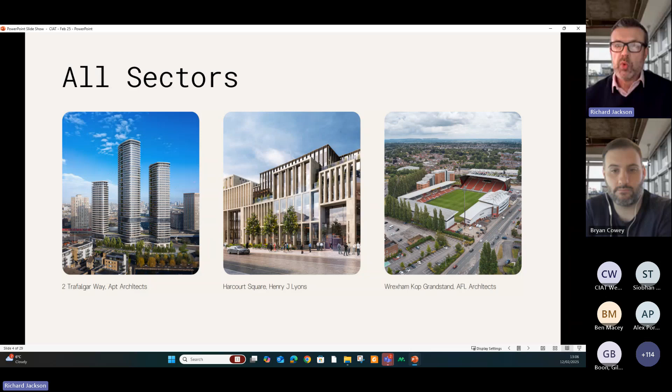These are the types, some of the clients that we work with - big names, little names, international practices, even down to small 1 or 2 man band practices. So we cover all shapes and sizes, we're not just covering the top 5% of the work, we're down to doing domestic scale too. Like I say, lots of different sectors - sports, commercial, residential, all sorts, even including large opera houses in the Middle East. So the scale and breadth of our experience is pretty broad.

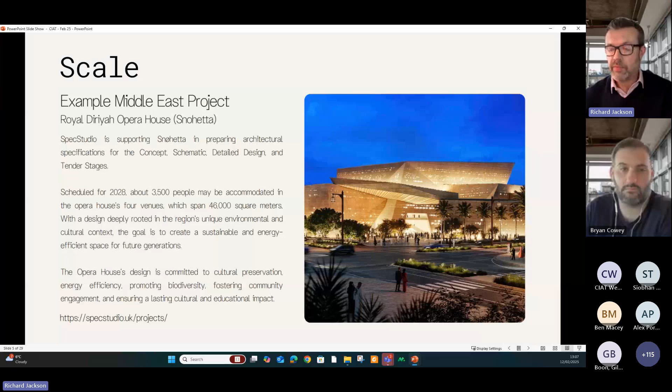So specification consultancy. A lot of practices over the years have had in-house spec writers, and it's usually a very experienced person who ends up working on most of the projects. Again, these people are few and far between, and it's a very skilled profession. But it's very difficult to retain those people. It's also difficult to gain knowledge of wider projects experience.

And this was really where specification consulting came from, in the late 90s with Foster and Partners, whereby the need to prepare different types of specifications to suit procurement came into play. The design and build really came to the fore, and performance specs in those days just weren't really available.

So that's really where it became a starting point. We were preparing bespoke, detailed specs that reflected the design intent, and it's not just about writing what products were required, it's actually conveying to the contractor what he needs to do. And hence the specification consultant profession in the UK has sort of flourished now to the extent that it is actually a bona fide profession, and it's actually contained within the plan of work.

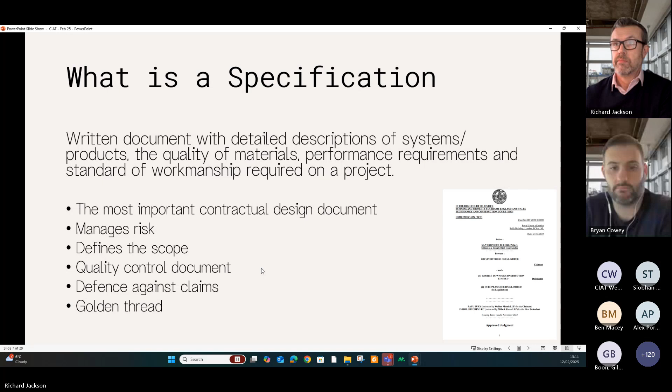It's not the most glamorous end of the design process. I think we all understand that, and most of these points would be quite familiar to a lot of you - hence why we're here. In terms of principles, these are things that really should never be done. It's quite surprising that specifications are given such low priority in the design process. There's a lot of emphasis given to the drawn set of information and the visual side of things, when the contractual element is contained within the spec, and that's really the important side of it.

So it should be started early. It shouldn't be copy and pasted from the previous one. It needs to be project specific and very clear and concise.

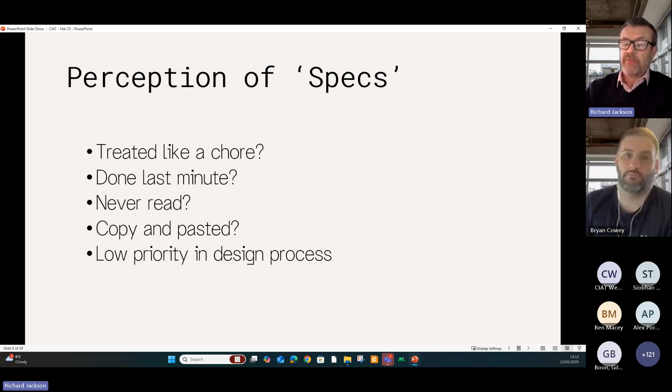In terms of base principles, the first thing we always say is, have you got your design responsibility buttoned down? Even the language we use now has been adopted by the RIBA in terms of prescriptive and descriptive information - these are extracts from the plan of work. In the old days these were specialist terms that weren't widely known. But having a clear and concise design responsibility matrix, both in terms of your appointments and right the way through when the contractor comes on board, is absolutely vital to set out who's doing what and when.

It doesn't have to be in this format, but ultimately it is a key document. So in terms of principles, that's the first thing we would advise every practice to adopt.

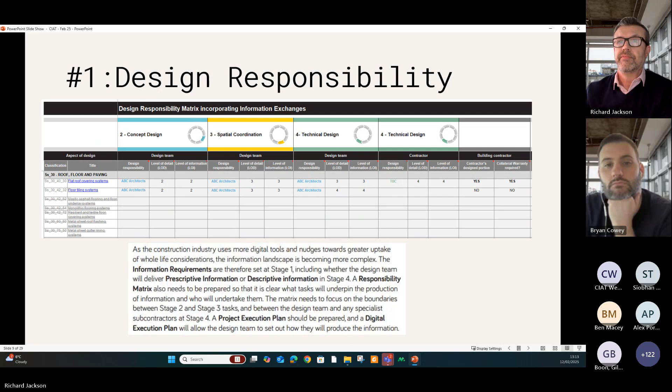Ultimately, the way we view it is there are two forms of specification. There's one which is prescriptive, whereby the designer takes design responsibility for the element - it might be that you fully name a product, or it might be materials and workmanship. But ultimately it's something the designer takes on board, whether that's the architect, landscape designer, technicians, whoever. The other is descriptive, which is a performance spec with the visual intent of the design drawings associated with it. In the old days we used to have clause 42, which was a non-visual item, but ultimately it's still descriptive - it's still a CDP item.

There's lots of different variations people come up with, like prescriptive plus or descriptive plus, and there are subtleties associated with all those variants. But when you distill it down, there's two main routes, and it makes life a lot easier to think about it that way.

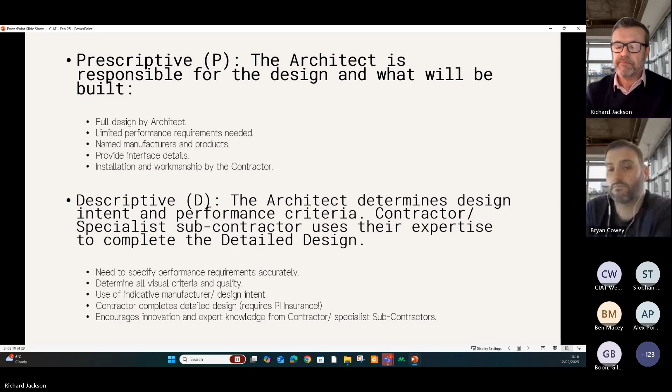The second key thing is that the specs should reflect the procurement route and form of contract. Here in the UK, the majority of projects fall into four categories of procurement. Traditional, obviously, where you're working right the way through as a designer. Design and build has been the most popular for major projects over the last 20 years. However, increasingly we're now seeing more MC and CM type contracts where clients want more influence over the actual procurement and less associated with a contractor, or where contractors don't want to take on the risk.

But the way the specification is written needs to be related to how it's going to be procured, and each of those come with their own quirks. Both MC and CM are usually done in packages, whether works packages or trade packages. The terminology for the various parties associated with those procurement routes needs to be embodied into the spec. So if it's design and build, it would be the employer or the employer's agent written to the contractor. If it was management contracting, it might be the management contractor to the works contractor, things like that.

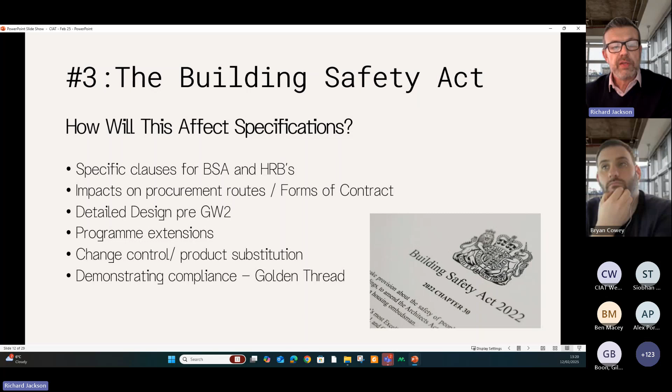But ultimately, in terms of spec, there needs to be the golden thread running through it in terms of demonstrating compliance. That means updating specification or being able to trace the authorship right the way through at the various different stages and who is taking ownership for those decisions. That comes through in terms of digital model, outputs from digital model, etc. But ultimately, from a specification perspective, there needs to be a way to track the changes. Again, there's no pro forma for that.

We're seeing in terms of programs, people are now incorporating specific durations into these for Gateway 2. Whether or not they are realistic is a different matter given the backlog. But it's just an example, really, that this is having a big impact on design teams right the way through Gateway 2 and also coming up to Gateway 3 now.

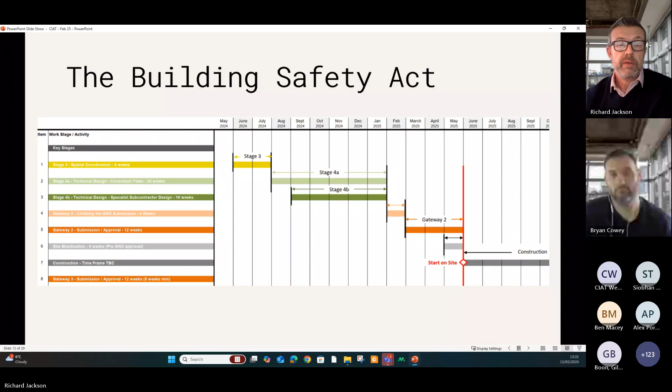So I'm just going to hand over to Bryan just to run through the main types of specification formats that you'll probably see.

Generally, within the UK, we have our CAWS, which is our Common Arrangement of Work Sections, and Uniclass, which has come in to hit the BIM requirements. Generally be more agnostic across these systems. We also have our outlining specifications which can be used at an earlier point, and we have developed an in-house small works specification as well to help with smaller residential style schemes. We'll go through that in a minute. And we have the CSI MasterFormat, which is used internationally across the Middle East and other areas which we use.

It's difficult to hear, it's a bit crackly Bryan. Sorry, so there's obviously a breakdown. Yeah, sorry Brian, can I just come in there? I was just wondering if it was a distorted microphone to anyone else, and it might be that we continue as we are, but potentially you might have another microphone. Is that any better? Mate, that is so much better. Let's continue like that, thank you so much. Okay, yeah, sorry about that.

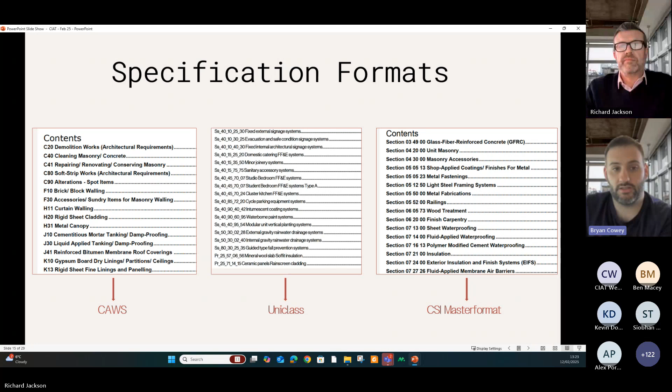Do you want to go to the next one? So we've got our CAWS here, published in 1987 and linked to SMM7. It's still probably our most popular one that we use in the UK still, and caters for the majority of clients where BIM isn't required.

I think what can be a misconception is that when you look at the BIM documents like EIRs and BEPs, you don't have to specifically use Uniclass specification formats. That is just kind of coding of the information within there, and you can still use your CAWS system because that's hitting more the level of information needs, which we've been looking at around how we can do all this.

So Uniclass is being developed by NBS, and it has kind of evolved into this system where people believe that they have to use this to hit the ISO 19650 requirements. But the feedback we've had from clients is generally that they're using it where they have to use it. They would prefer to use CAWS where possible.

It is a lot more prescriptive in the information that you have to produce, and having done a number of them, it can be a lot more time consuming to produce that information between it. And yeah, there's just a lot more workmanship and execution that's tagged on, as you're having to try and do that even in descriptive areas as well.

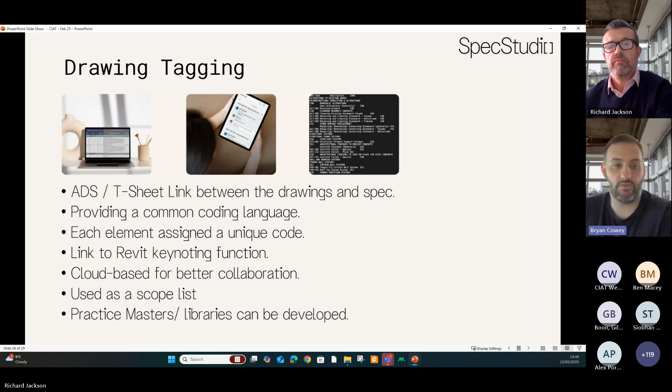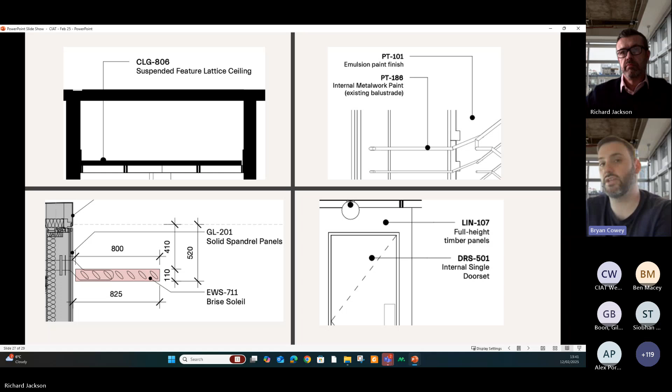This is how we advise people to tag these areas. If you've got, for example, CLG 806 suspended feature lattice ceiling, they can look at the ADS, which is published with the spec in one document, and the contractor is forced to look at the drawing, look at the ADS, and look at the spec. So all your information is within there - any framing out required, fixings, screws, everything is all within there, so they're reading the information side by side.

I've been a technician for a long time, and I've done the same, where I've put a lot of information on drawings, but through feedback with our client base, a lot of clients have taken on this way of doing it, so they are pushing the specs and the drawings to align more.

This one is a drawing demonstrating how you can tag in the Uniclass environment using the SS codes and the PR code to pick up individual items. We're not wanting to pick up a wall tie or product reference directly on the drawing; instead you say this is the PR code for the wall tie, go look in the specification for that information. You generally want to avoid British standards and manufacturers' names within a drawing, because that's the whole point of the spec - that information is locked in there. It tidies up the drawings and makes it easy for people to read.

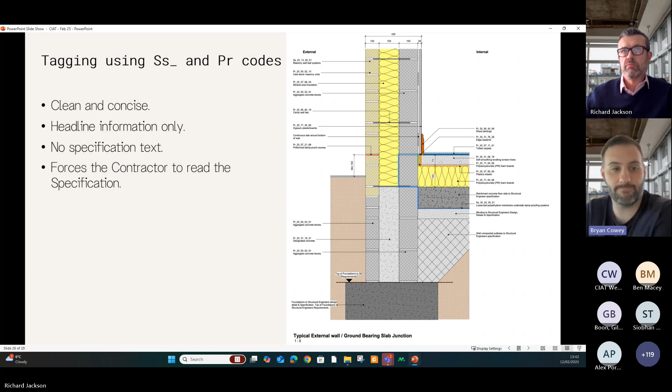Just in terms of where things are going, as with all these things, there's always change, and there's always different types of specification software platforms being promoted. We're not here to talk about any of those specifically.

But I think in the future there is going to become a dependence upon these platforms that is more and more prevalent, which means it takes you down a certain route. We're agnostic in terms of the software system, so we'll work on all of them. But really, I think AI will become more prevalent in how these pieces of software link together and link back to the model, and that's something we are investigating ourselves.

There seems to be quite a pace of change, and I think it's going to be difficult to keep pace with that if you're not doing it day in, day out, because the functionality of these things is ever increasing, so it's becoming quite a complicated thing to do in terms of actually preparing specifications these days.